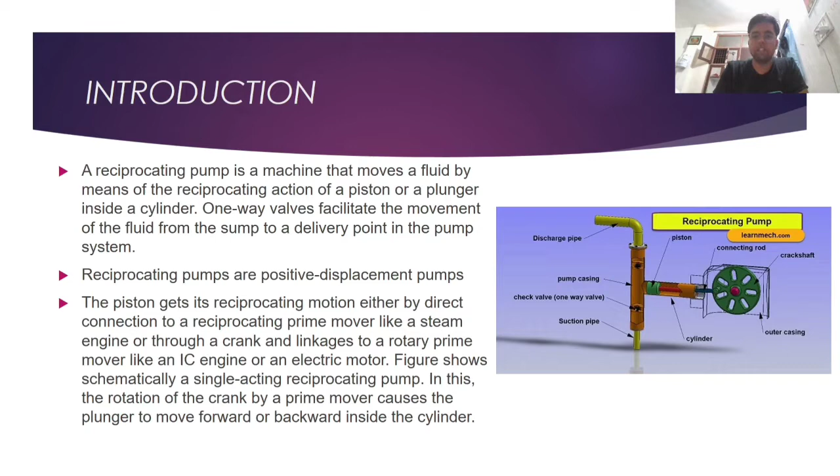To better understand this, let us use a video. These are basically the components inside a reciprocating pump: first a piston, then a cylinder. The piston is connected to the crankshaft through a connecting rod, and the crankshaft is connected to a motor.

The motor rotates the crankshaft, and the rotary motion is converted into reciprocating motion by the crankshaft. This reciprocating motion is then transferred to the piston through the connecting rod, which we will understand by the animation.

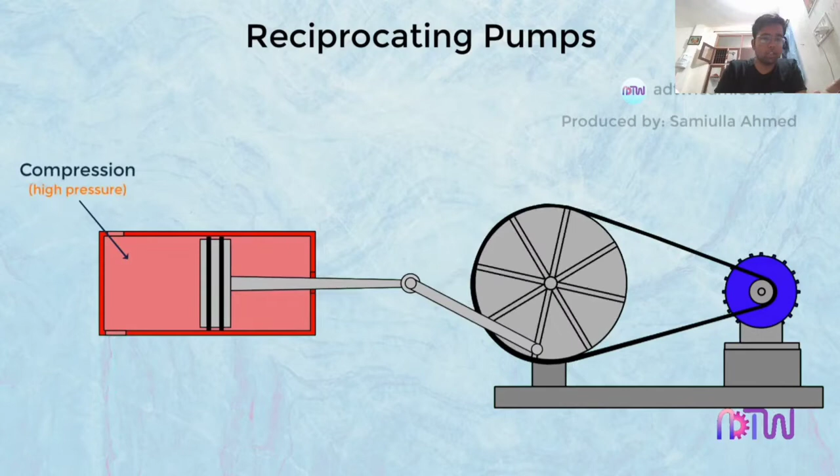As you can see, the crankshaft undergoes rotary motion and the piston goes reciprocating as well, first left then right. These are the two valves connected at the extreme left position of the cylinder. These are non-return valves: the bottom one is the suction valve, and the upper one is the delivery valve.

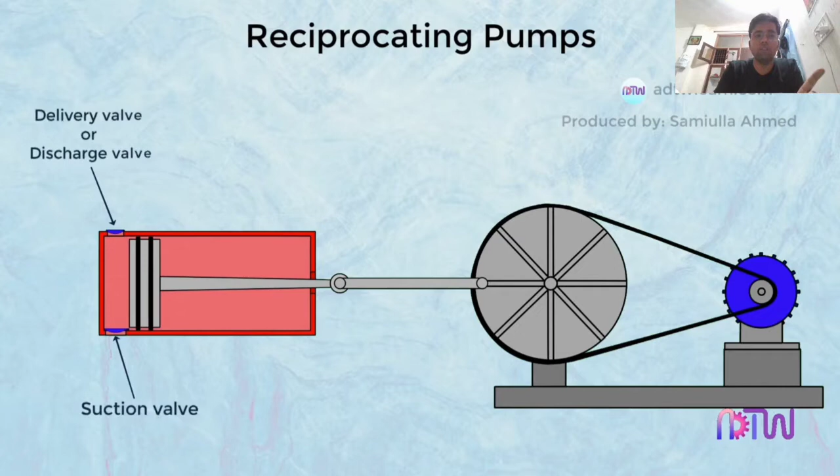When the piston moves from left to right, a low pressure is generated in the region above the suction valve. So from the sump, water is pumped into the cylinder. After that, as the piston goes to the extreme right position, you can see that all the water from the sump has been taken into the cylinder.

After this point, the suction valve closes and the delivery valve, which was closed, opens. Here the compression of the water takes place, and after that the water is discharged through the delivery valve into the tank.

A reciprocating pump is basically of two types: first is the single acting reciprocating pump, and the second is the double acting reciprocating pump. The example shown here is a single acting reciprocating pump. In a single acting reciprocating pump, there is actually a timed discharge.

As you can see, the suction valve opens, then the delivery valve opens. So the supply of fluid is not actually constant. We do provide some mechanism so that it can be constant, but it's not 100% constant at the same time.

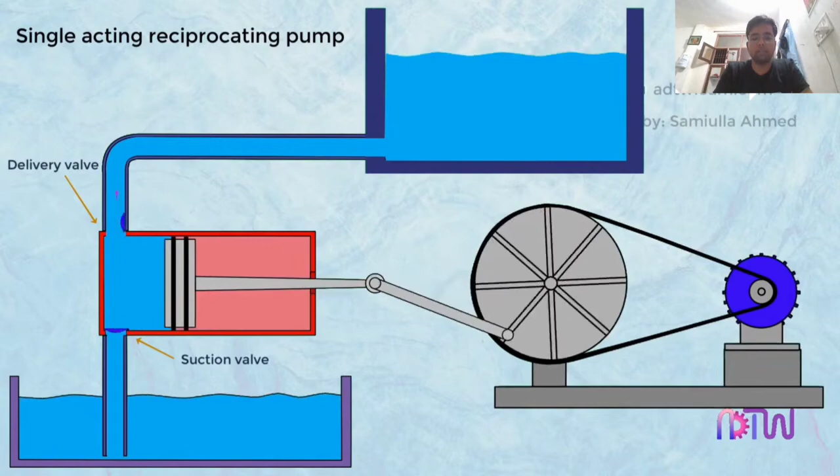Now I will talk about the second type of reciprocating pump, the double acting reciprocating pump. It has the same mechanism as the single acting reciprocating pump, the only difference being that at its extreme right position, two more valves are opened. In the double acting reciprocating pump, the cylinder is divided into two chambers.

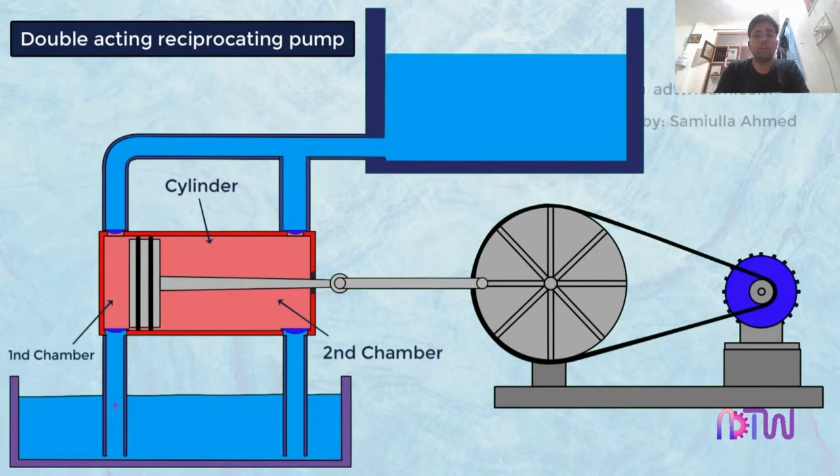In the first motion of the animation, when the piston moves from left to right, the suction valve opens in the first chamber, and through the sump the water is pumped into the cylinder. After that, it goes into compression, the discharge valve opens, and the suction valve of the first chamber closes.

Simultaneously, in the second chamber, the suction valve opens because a low pressure is generated at the extreme right position. So now the delivery valve of the first chamber is opened and the suction valve of the second chamber is opened at the same time.

After this, the discharge valve of the first chamber closes and the discharge valve of the second chamber opens, and the suction valve of the first chamber opens once again.

So it is a simultaneous process: when the piston moves from left to right, at that point in the first chamber the inlet valve is opened and the discharge valve is closed, as in a single acting reciprocating pump.

But when the piston moves from right to left again, a low pressure is generated at the extreme right position, where there is also an inlet valve which opens. Due to this low pressure, water from the sump comes in through the second chamber into the cylinder, after which it goes to the extreme left position.

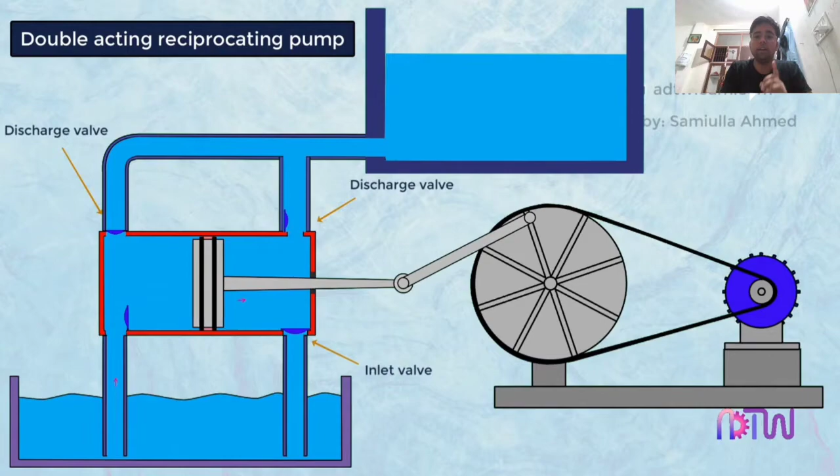Now let us come back to the PPT. Here I am basically showing the working I have already explained with the help of the video. Now what I am showing you here is a graph.

This graph shows the discharge versus crank angle for a single acting reciprocating pump. In the first stroke, when the piston moves from left to right, the crank moves from 0 to 180 degrees. At that moment no discharge is taking place, so the discharge value is 0 and there is nothing in the graph.

After that, when the piston moves from right to left, the crank moves from 180 to 360 degrees. At that point discharge is taking place because the discharge valve is open. At the midpoint of the cylinder, the discharge is at its maximum, at 270 degrees, as you can see from the graph. So we get a parabolic shape from 180 to 360 degrees.

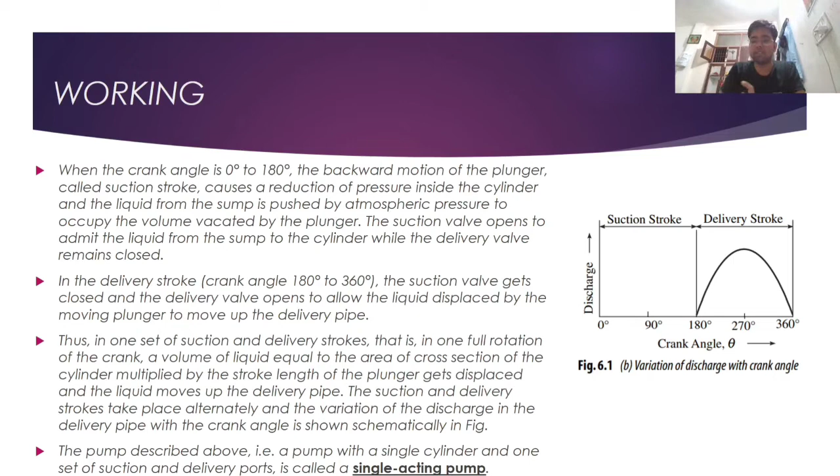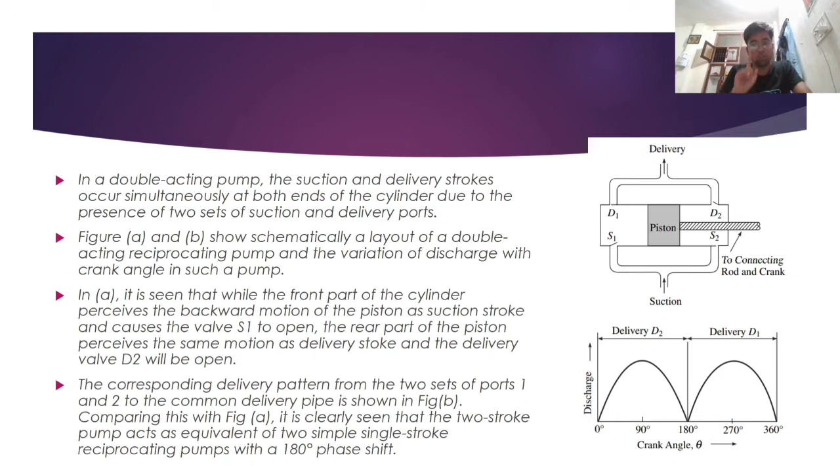Now here is the classification. The first type of classification of reciprocating pump is based on what is driving the pump: direct acting and indirect acting pump.

Sometimes we don't have a direct supply, so instead we use an electric motor or an IC engine to give us the power. This type of reciprocating pump is known as a power driven reciprocating pump.

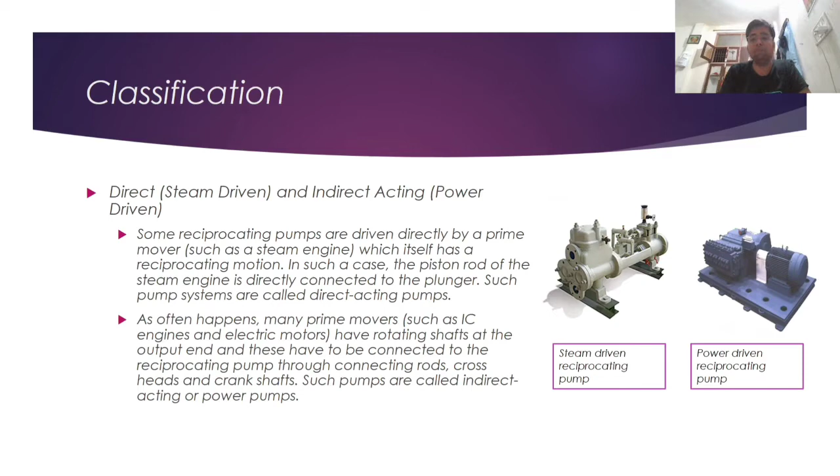The second type of classification is based on the number of cylinders: single cylinder, double cylinder and multi-cylinder pumps. A single cylinder pump has only one cylinder, and one-cylinder pumps are called simple pumps.

In a double cylinder pump there will be two cylinders. The suction pipes of both cylinders are connected to a common suction pipe, and the outlets of the two cylinders are connected to a common delivery pipe. This type of pump is known as a two-throw pump.

A multi-cylinder pump has multiple cylinders. This arrangement is employed to get a more steady flow in the delivery pipe. It is the most complex but also gives the most steady supply of water into the tank.

The third type of classification is vertical or horizontal, depending on the mounting of the pump. The reciprocating pump can be mounted either vertically or horizontally depending on the space and other operational features.

Another classification is low pressure or high pressure reciprocating pumps. Reciprocating pumps are employed for low discharge under high pressures, with pressure ranging up to as much as 150 atm, so the terms low and high are relative. Generally pressures up to 50 atm are treated as low pressure, and pressures higher than that are treated as high pressure reciprocating pumps.

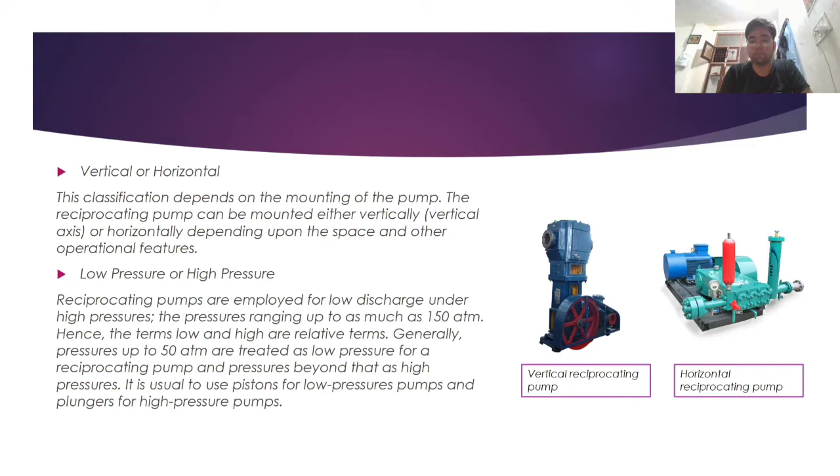Now, this is a common mistake that most people make: the difference between a piston and a plunger. In connection to a reciprocating pump, the terms piston and plunger are used interchangeably. Their functions are mostly the same, but they do have a difference between them.

A plunger is a smooth cylindrical rod attached to a slider or rod mechanism. A stationary seal is used around the plunger, and the plunger moves through the stationary seal ring. A piston consists of a cylindrical disc provided with a seal at the outer diameter. The piston is attached to a smooth rod called the piston rod that imparts reciprocating motion at the liquid end of the piston. The seal in the piston top moves with the piston.

For the plunger, because of this construction, plungers are single acting. For a double acting mechanism with plungers, two cylinders are required, and plungers are only used for high discharges, usually greater than 50 atm. Pistons can be used for low pressure also, that is less than 50 atm, and relatively high flows. Further, pistons are used in both single acting and double acting pumps.

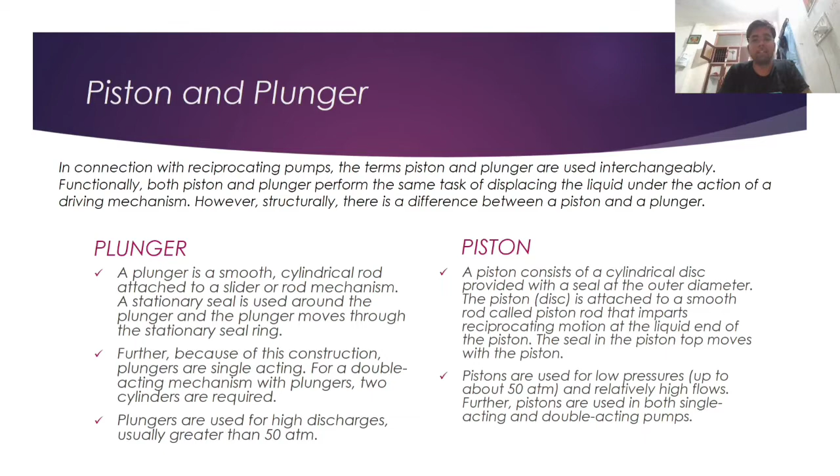So let L be the length of the stroke, A be the cross sectional area of the cylinder, and N be the speed of the crank, in RPM.

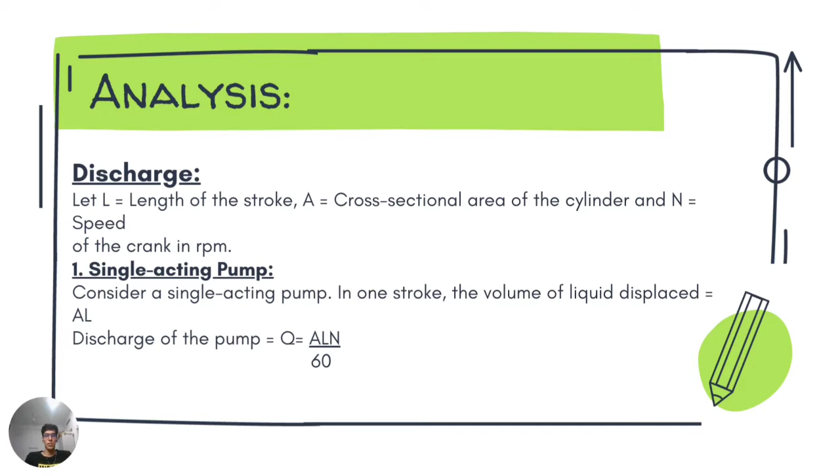Firstly, coming to the single acting pump. Consider a single acting pump: in one stroke, the volume displaced is equal to A into L, area into length of the stroke. Therefore, discharge of the pump Q is equal to A into L into N upon 60. Now coming to the double acting pump.

In a double acting pump, both sides of the piston will be displacing the liquid. In one revolution of the crank, the volume of liquid displaced is equal to A into L, which is the left side of the piston, plus (A minus AP) into L, where A minus AP is the area of the piston from the right side minus the area of the piston rod, where AP is the area of the piston rod attached to one end of the piston to connect it to the crankshaft.

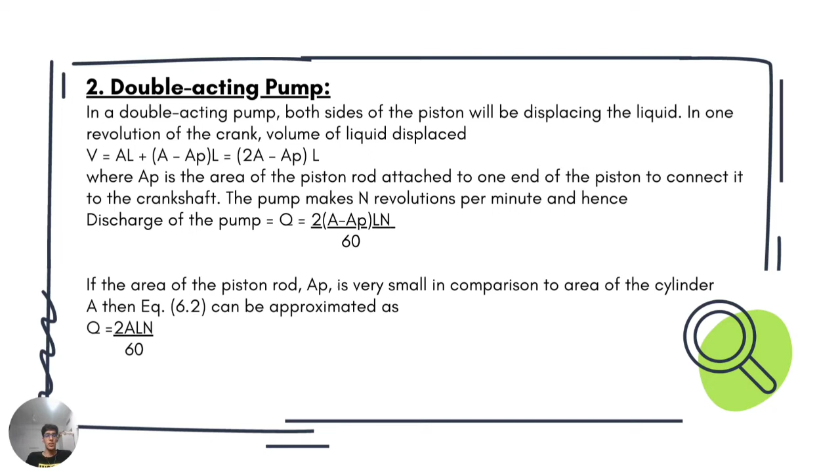The pump makes N revolutions per minute, and hence the discharge of the pump Q is equal to 2 into (A minus AP) into L into N upon 60. If the area of the piston rod AP is very small in comparison to the area of the cylinder A, then this equation can be approximated as Q equals 2 into A into L into N upon 60, which is nothing but 2 times the discharge of the single acting pump.

Now coming to volumetric efficiency. As discussed above, the earlier equations are the theoretical discharge of an ideal single acting and double acting reciprocating pump. The actual discharge of a pump may be less than the value given by the equation. This may happen for the following reasons: firstly, the major cause is slippage of fluid back past the pump valves because they cannot be closed or sealed instantly. This will vary between 1 to 5% based upon the pump speed and valve design.

Now, the volumetric efficiency of the pump, in percentage, is defined as eta V equals actual discharge upon theoretical discharge into 100, which is equal to QA upon Q, actual discharge upon theoretical discharge, into 100.

Now coming to the second term, coefficient of discharge. The ratio of actual discharge to the theoretical discharge is known as the coefficient of discharge, CD. Thus, CD is equal to actual discharge upon theoretical discharge.

Now coming to velocities and discharges. The displacement of the piston from the end of the stroke, x, is equal to r minus r cos theta, which is equal to r minus r cos omega t, which we have calculated through the crankshaft angle and the displacement of the piston.

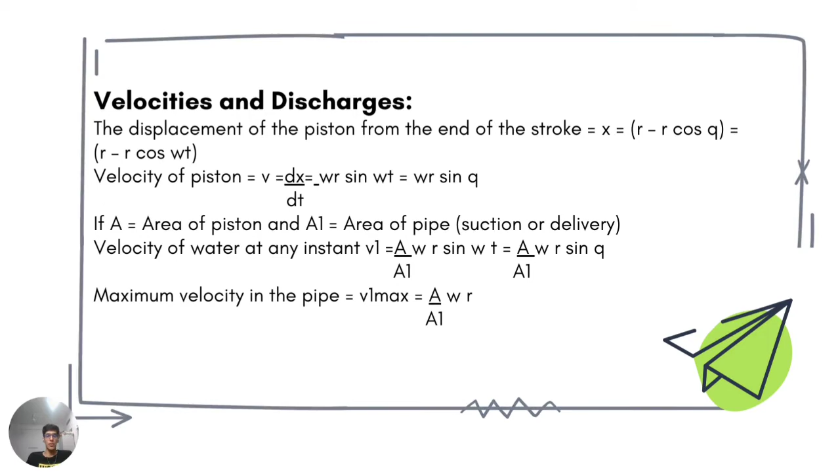So the maximum velocity in the pipe, by differentiating further, we have calculated, is equal to V1 max equals A upon A1 omega R. The mean velocity in a single acting pump is calculated by this formula, which gives us the result V1 max upon pi. Thus, the average velocity in the pipe, V1, is equal to A upon A1 omega R by pi.

Also from the above equation, the ratio of mean discharge Q to maximum discharge Q max in the delivery pipe equals Q upon Q max, which equals V1 upon V1 max, which is thus equal to 1 upon pi. We have also calculated the acceleration of the piston.

Acceleration is dV by dt. By calculating dV by dt, we get the acceleration of the piston, which equals omega square r cos theta, where theta is the angle of the crankshaft.

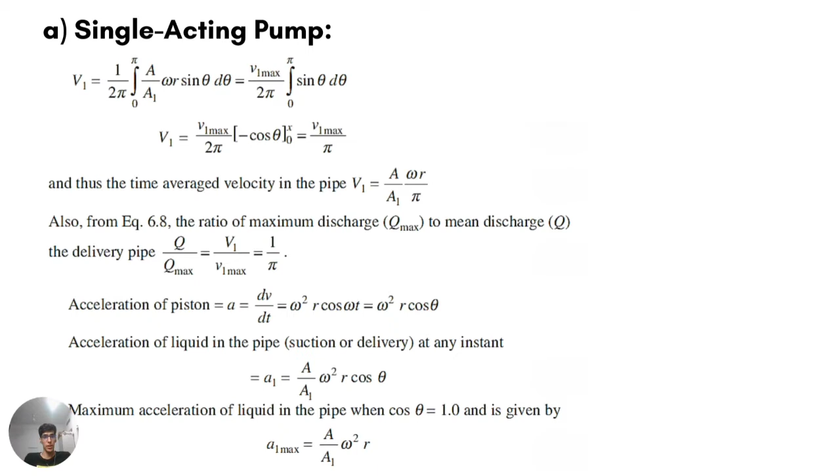Acceleration of liquid in the pipe, suction or delivery, equals a1, which equals A upon A1 omega square r cos theta.

Now coming to speed for double acting pump. For a double acting pump, the mean velocity of flow in one complete revolution of crank is given by V1 equals V1 max by 2 pi, integrated from 0 to pi of sin theta. Integrating sin theta, we get minus cos theta, giving 2V1 max by 2 pi, which equals 2V1 max by pi. So the ratio of V1 by V1 max equals 2 by pi.

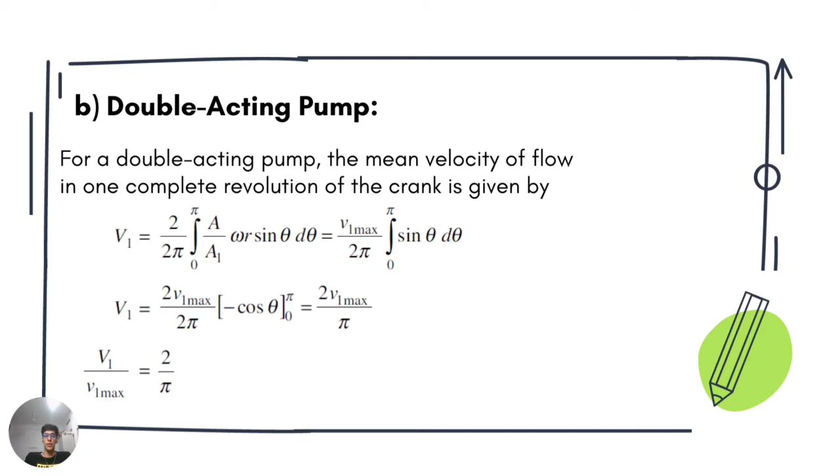Now coming to the variation of discharge in multi-throw pumps. By careful tracking of discharge in various cylinders at different crank angles, the flow variation in multiplex pumps can be worked out. Different figures show the variation for single, double, and three-throw pumps.

Expressing the variations of discharge as ratios of the average discharge. The theoretical flow variations for various commonly used multiplex pumps are represented. The table shows different values of discharge in different types of reciprocating pumps, clearly showing the advantage of multiplex pumps in obtaining uniform flow in the delivery pipe.

Analysis of the flow variation in double-acting multiplex pumps indicates improvement when compared to the simplex pump.

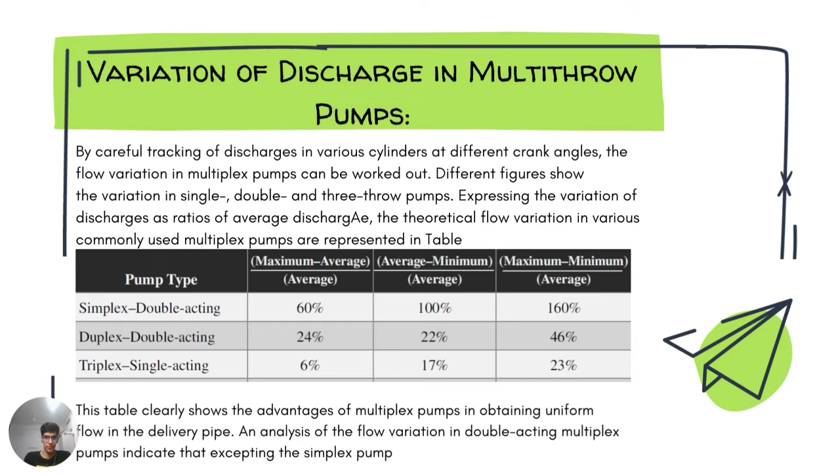Acceleration head is the energy required to change the velocity of the liquid in the system from an at-rest or zero condition to some non-zero value.

Now I will tell you about the principle of acceleration head. When the crank starts to rotate, the piston starts to reciprocate forward and backward within the cylinder between two extreme positions, the inner dead center and outer dead center. The velocity of the piston will be zero at these positions and maximum at the middle of the stroke, known as the center of the cylinder.

We can say that at the start of the stroke, suction or delivery velocity of the piston will be zero, then increasing to become maximum at the middle of the stroke, then decreasing until velocity becomes zero again at the end of the stroke.

Therefore, at the start of the suction or delivery stroke, the piston will have acceleration, which decreases to zero at the middle of the stroke. Further, retardation begins and becomes maximum at the end of the stroke.

In simple terms, the piston has acceleration at the start of the stroke and retardation at the end of the stroke. Since water in the cylinder is in contact with the piston, the velocity and acceleration of water in the suction and delivery pipe depend on the velocity and acceleration of the piston.

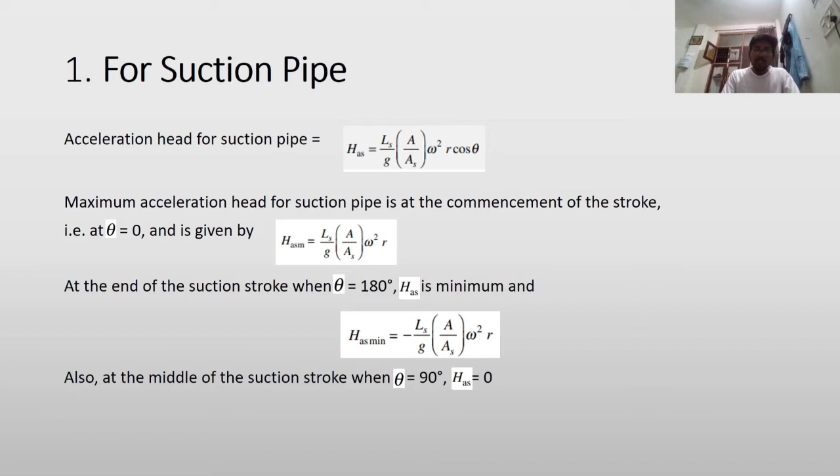At the end of suction stroke, when theta equals 180 degrees, acceleration head for suction pipe is minimum, and is minus Ls upon G, A upon As, omega square r. Also, at the middle of suction stroke, when theta equals 90, acceleration head for suction pipe is equal to 0.

For delivery pipe, acceleration head for delivery pipe is equal to LD upon G, A upon AD, omega square r cos theta, in which LD is length of delivery pipe, upon gravity into area of cylinder upon area of delivery pipe.

The maximum acceleration head for delivery pipe is at the commencement of the stroke, when theta equals 0, and is given by LD upon G, A upon AD, omega square r.

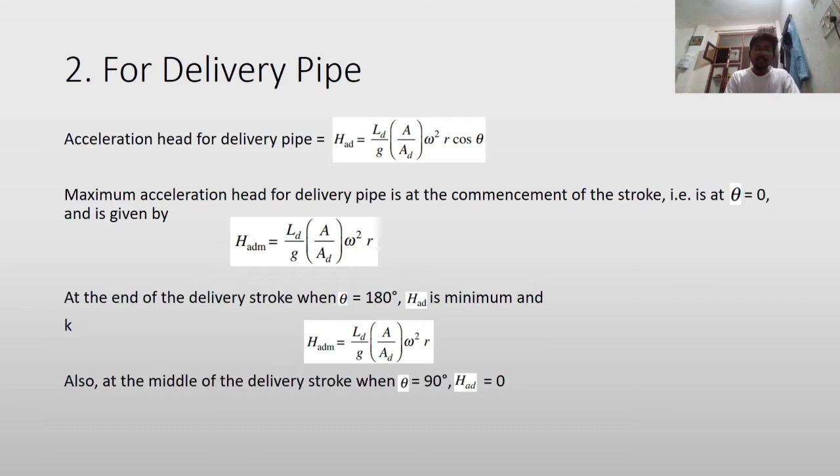At the end of delivery stroke, when theta equals 180 degrees, acceleration head for delivery pipe is minimum, and is LD upon G, A upon AD, omega square r. Also, at the middle of delivery stroke, when theta equals 90 degrees, acceleration head of delivery pipe is equal to 0. Now, correction for non-simple harmonic motion.

The flow of liquid in suction and delivery pipes causes a friction loss, and the pump has to provide power to overcome this loss. The friction loss HF is calculated using the Darcy-Weisbach equation, in the same form as used in steady flow in pipes.

Thus HF is equal to FLV square upon 2GD, where F is Darcy-Weisbach friction factor, V is average velocity in the pipe, and D is diameter of the pipe. In the present case, time average velocity in the pipe is used, and friction factor as given typically in Moody's diagram is used.

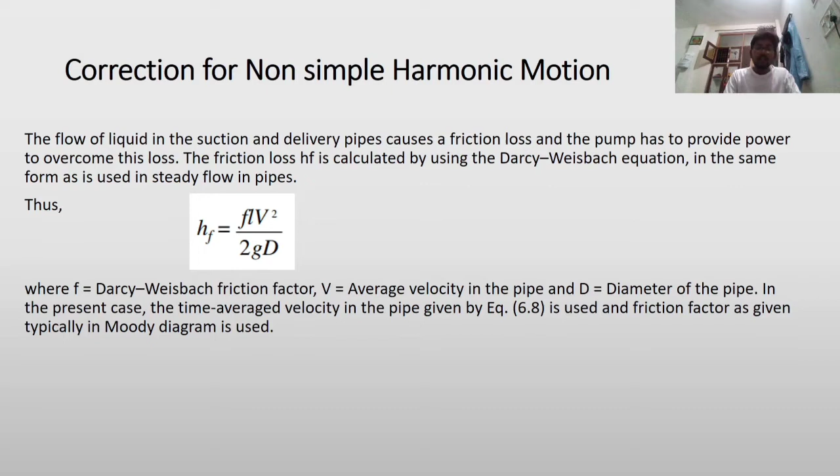Now, correction for non-simple harmonic motion for suction pipe, where frictional head loss HFS is equal to FLS upon 2G ds, A upon AS, omega r sin theta, whole square.

Since HF is a function of sin square theta, the frictional head loss varies parabolically with theta. This gives the average value of head loss in friction as 2 by 3 times the maximum value of frictional loss of head.

Maximum head loss due to friction in suction pipe occurs at theta equals 90 degrees, and its value is given by FLS upon 2G ds, A upon AS, r omega, whole square.

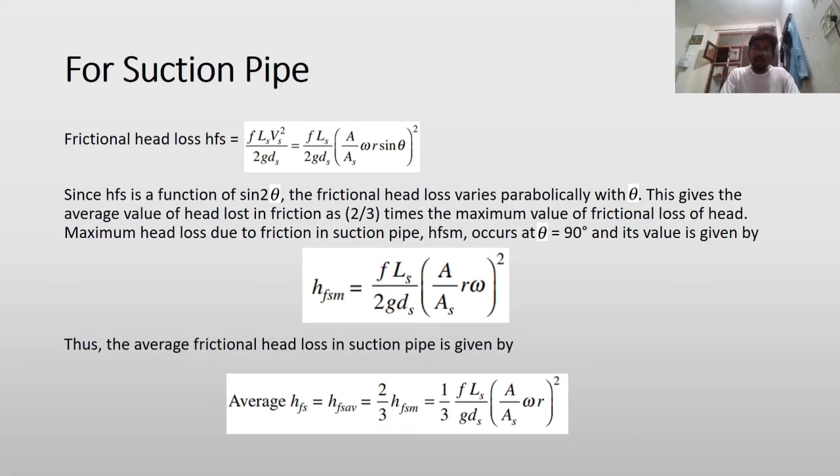Thus the average frictional head loss in suction pipe is given by 2 by 3 HFSM, which is equal to 1 by 3, FLS upon G ds, A upon AS, omega r, whole square.

Now, combined effect of static, acceleration, and friction heads. In a simple reciprocating pump, the pump has to produce enough head to overcome static head, friction head, and acceleration head at both suction and delivery pipes. Considering the suction pipe first, the total head in suction pipe measured as absolute pressure head is HTS equals HATM minus HS plus HAS plus HFS, where HATM is atmospheric pressure, HS is static suction head, HAS is acceleration head in suction pipe, and HFS is average friction head in suction pipe.

Similarly, in the delivery pipe, the total head measured as absolute pressure head is HTD equals HATM plus HD plus HAD plus HFD, where HATM is atmospheric pressure, HD is static delivery head, HAD is acceleration head in delivery pipe, and HFD is average frictional head in delivery pipe.

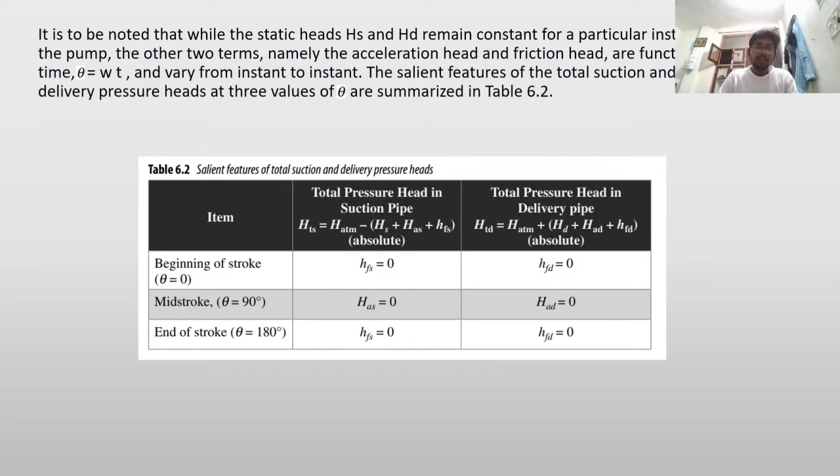An indicator diagram of a reciprocating pump is a plot showing the variations of pressure in the cylinder, the displacement of the piston, and at various stages of the piston strokes. The area of the indicator diagram represents the work done by the pump per unit weight of the liquid in one complete revolution of the crank.

Figure 1 shows a theoretical indicator diagram of an ideal reciprocating pump, a pump with no acceleration head and no frictional losses. The ordinate represents the pressure heads on the plunger and the abscissa represents the displacement of a plunger of unit length. The horizontal line, that is O O,

as shown here, the O O datum line at the bottom of the figure represents the absolute zero pressure head, which is taken as the datum for pressure heads. Line AB represents the atmospheric pressure head, HATM.

Line JK represents the suction stroke. Point J represents theta equals 0, and point K represents theta equals 180 degrees of the suction stroke. The suction head developed at the cylinder inlet is HS at location J, and it remains constant all along the stroke till the end point K.

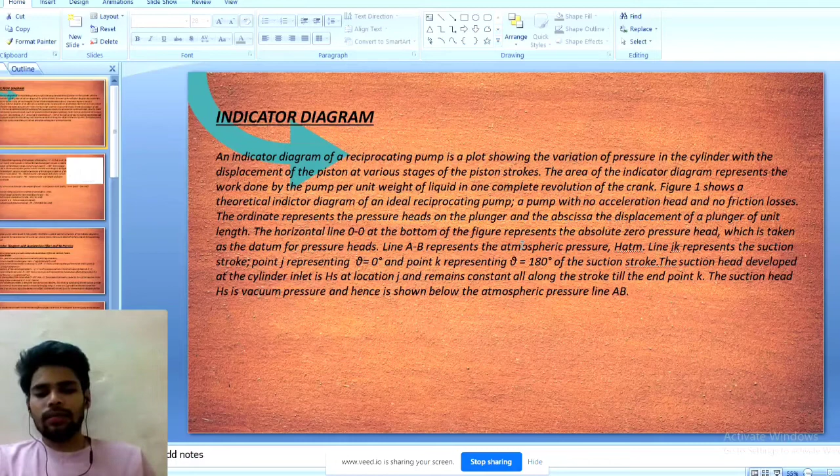Now point I marks the beginning of the delivery stroke with theta equals 0, as shown here, and at that point the pressure head in the cylinder is HD, and the head developed remains constant till the end of the delivery stroke at M, at which theta equals 180 degrees. The pressure head HD, which is above the atmospheric pressure, is marked accordingly in the figure.

The stroke length, which is equal to the length of the plunger, is taken as unit dimension. Area JKBA equals HS, which is equal to the work done per unit weight of the fluid in a suction stroke. Similarly, area ABLM equals HD, which represents the work done per unit weight of fluid in the delivery stroke.

Hence, total work done per unit weight of fluid equals area JKBA plus area ABLM, that is HS plus HD. If the area of the cylinder is A and the stroke length is L, then the weight of liquid pumped in one revolution of the crank is W times A times L. Work done per revolution of the crank is WAL(HS plus HD). Now the theoretical work done per second, PT, equals WALN divided by 60, multiplied by HS plus HD.

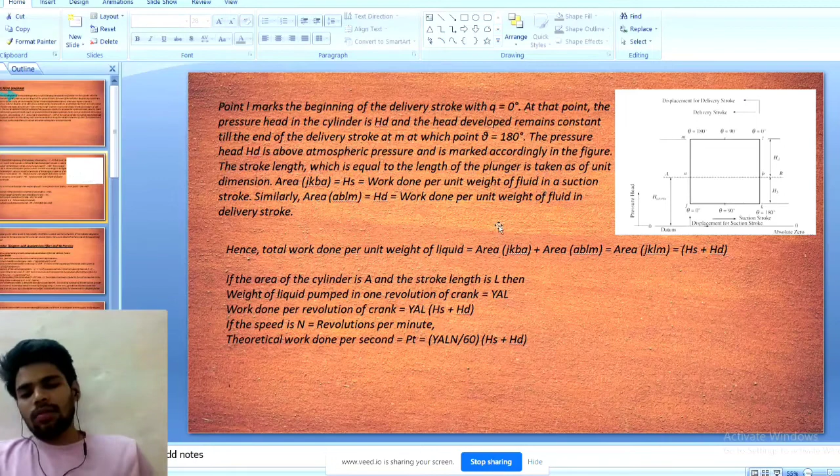Now let's start the indicator diagram with acceleration effect but no friction effects. Let's consider a single acting simplex pump with acceleration effect but without friction. First stroke is the suction stroke. The equation gives the acceleration in the suction pipe at any instant.

Acceleration head for the suction pipe HAS equals LS divided by G, multiplied by A divided by AS, multiplied by omega square r cos theta. The maximum acceleration head for the suction pipe is at theta equals 0, that is at the beginning of the stroke, and is given by HAS equals LS by G multiplied by A divided by AS, omega square r.

Also, at the middle of the stroke when theta goes to 90 degrees, the acceleration head term goes to 0 and is added to the suction head HS. At the end of the stroke at theta equals 180 degrees, HAS is minimum, so being a deceleration effect, it is deducted from the suction head HS.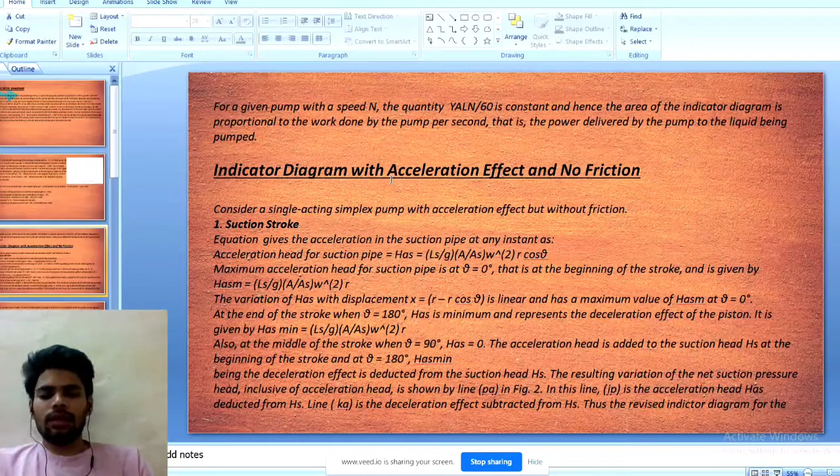The resulting variation of the net suction pressure head inclusive of the acceleration head is shown by the line PQ in Figure 2, shown here. So the suction stroke that includes the acceleration effect is APQB, that is A, P, Q and B.

Note that the triangular portions JPP1 and P1KQ are identical and hence are of equal area. Hence area APQB equals area AJKB, which equals HS multiplied by 1, which comes out to be HS.

In the second stroke, that is the delivery stroke, the column of water in the delivery pipe will be accelerated at the beginning and the first half of the delivery stroke. It will be decelerated in the second half of the stroke until the end of the stroke.

The acceleration head for the delivery pipe is given by the equation HAD equals LD divided by G multiplied by A divided by AD into omega square r cos theta. HAD is maximum at the beginning of the delivery stroke, when theta equals 0, with maximum value HAD equals LD by G multiplied by A divided by AD multiplied by omega square r. At the middle of the stroke, when theta equals 90, HAD equals 0, as indicated by the point shown here.

The rectified indicator diagram of the delivery stroke, accounting for acceleration effect, is the area ABRS. The areas ABRS and ABLM indicate that acceleration does not change the total work done in the delivery stroke, but only alters the distribution of the pressure head at various displacements of the delivery stroke.

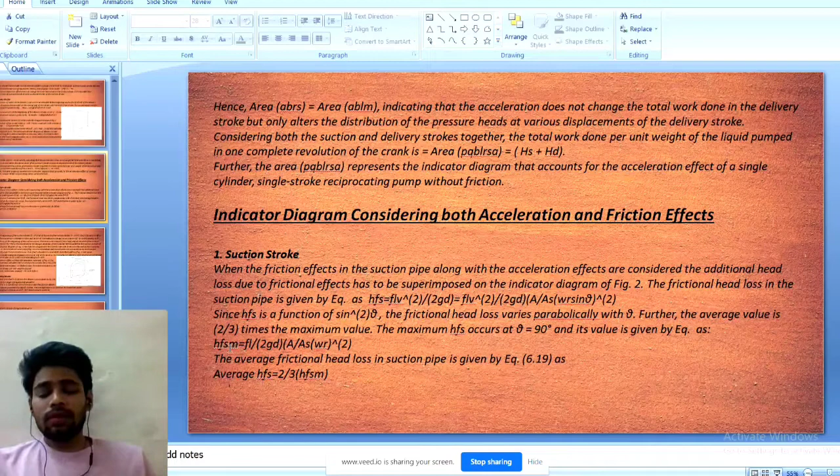At the beginning of the suction stroke, when theta equals 0, and at the end of the suction stroke, when theta equals 180, the frictional loss HFS is 0. The maximum ordinate is HFSM, which occurs at the mid suction stroke, at point E of figure 3 as shown, corresponding to theta equals 90 degrees. Thus at the beginning of the suction stroke, the total suction head is HS plus HAS, and at the end of the suction stroke it is HS minus HAS.

Now for the delivery stroke, the head loss due to friction in the delivery pipe is given by HFD equals FLV square divided by 2GD, which equals FL divided by 2GD into A divided by AD into omega r square sin theta. Since HFD is a function of sin square theta, the frictional head loss in the delivery stroke varies parabolically with theta.

Further, the average value is 2/3 times the maximum value, and the average frictional head loss in the delivery pipe is given by equation 6.22: average HFD equals 2 by 3 of HFDM. The indicator diagram for the delivery stroke will have the extra head HFD added to the indicator diagram of figure 6.5.

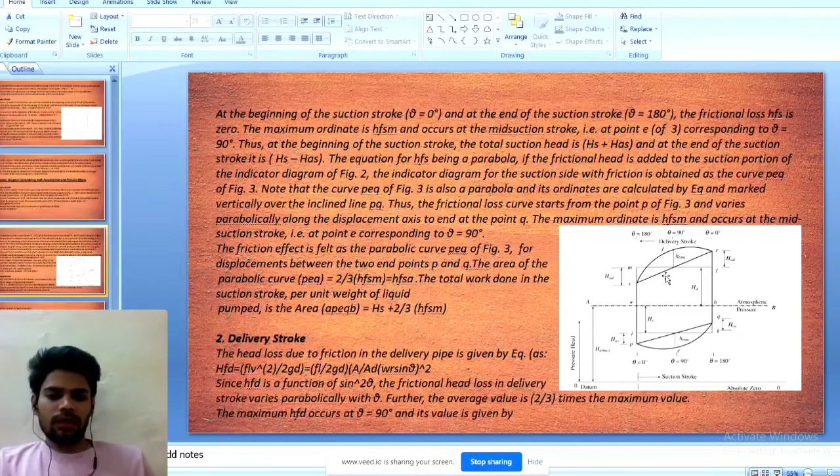The resulting indicator diagram of the delivery pipe is shown in figure 6.6. The parabola RFS reflects the frictional effects, with the maximum of this parabola occurring at point F, corresponding to theta equals 90 of the delivery stroke.

Now, the theoretical work done per second. The total work done per unit weight of liquid pumped in one complete revolution of the crankshaft is the sum of the areas of the indicator diagram of the suction and delivery strokes, given by the areas represented by APEQ PRFS of figure 6.6. This equals HS plus 2/3 of HFSM plus HD plus HFSDM.

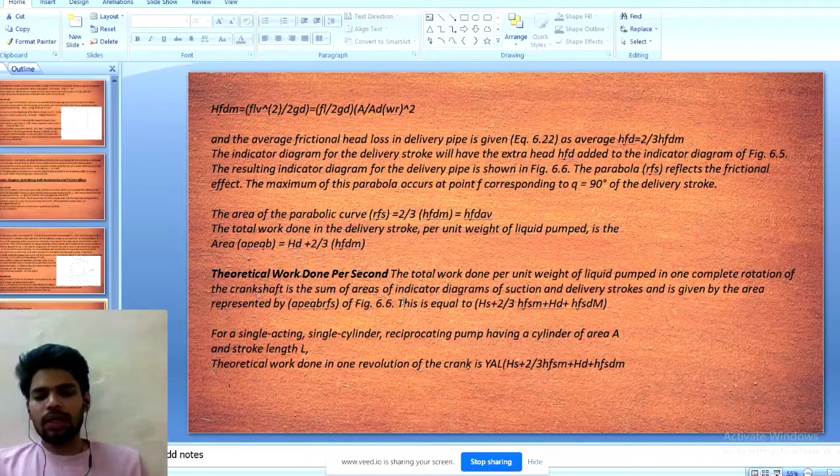If N represents the speed of the pump in revolutions per minute, then Pt equals YALN divided by 60, multiplied by HS plus 2 by third of HFSM plus HD plus HFSDM.

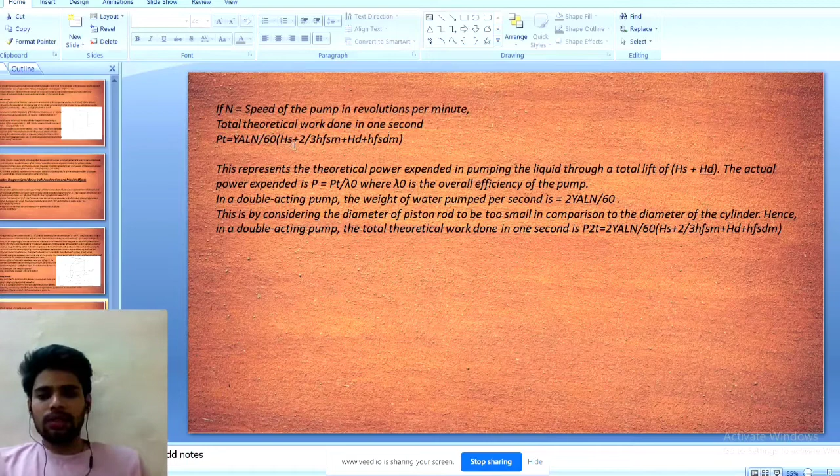General characteristics: efficiency. There are two types of efficiency, volumetric efficiency and mechanical efficiency. Volumetric efficiency loss is essentially due to slippage at valves and seals. Mechanical efficiency loss arises due to friction at bearings and at speed reducing devices. Thus, the efficiency of a reciprocating pump is normally very high, being of the order of 85 to 90% in a well-maintained pump.

Second, pressure. Capacity to produce high pressure is a special feature of the reciprocating pump. Pumps with pressure up to 70 bar are routinely used, and special pumps can have pressure as high as 400 bar.

Third, priming. The reciprocating pump is self-priming. However, where possible, to reduce wear or the risk of seizure, it should be flooded with liquid before starting.

Fourth, pressure pulsation. Pressure pulsation is inherent in the reciprocating mechanism. Flow variation is an indication of scope of pressure fluctuation, which is a product of acceleration created by the pump. A pulsating pump flow may require special design consideration in the piping system to avoid vibration of piping and consequent failure of system components by fatigue.

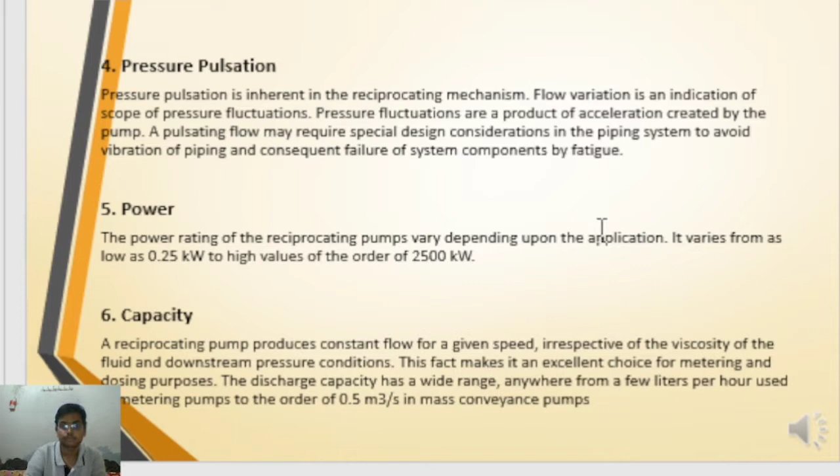Speed. Reciprocating pumps are essentially slow speed pumps. Usual speed covers a range from about 100 rpm up to 700 rpm. Reducing gears are invariably used when the prime mover is an electric motor or an IC engine.

Now coming to the application. Industrial use: reciprocating pumps can handle a full range of liquids, from low viscosity chemicals to high viscosity materials like heavy oils, from clean water to high particle content slurries including concrete. In view of the wide operating range, reciprocating pumps are often the choice for difficult applications, especially when the discharge is low and pressure is high.

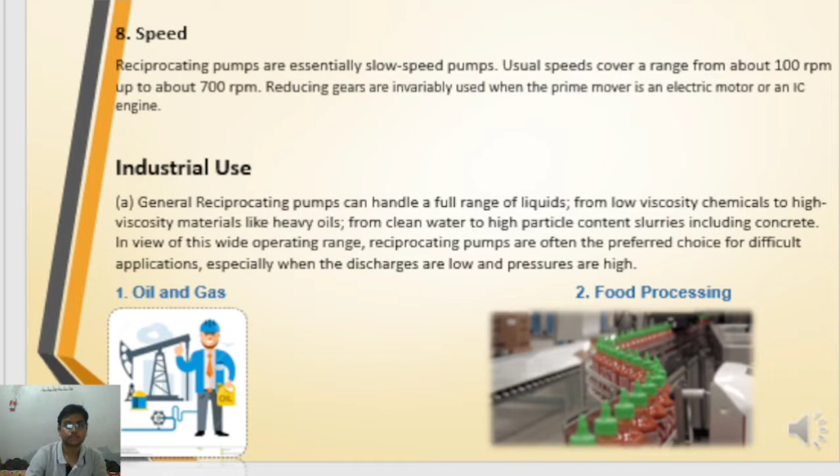Applications include oil and gas; second, food and food processing; third, mining; fourth, water treatment plants.

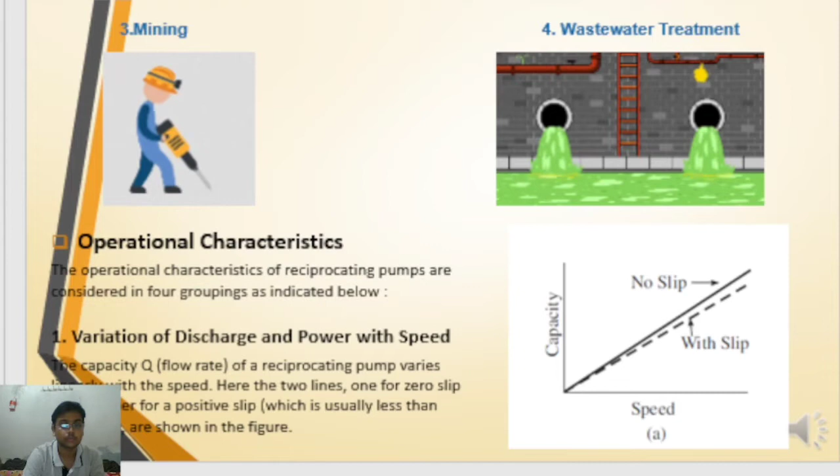Now coming to the operational characteristics. The operational characteristics of reciprocating pumps are considered in four groupings. First, variation of discharge and power with speed. The capacity Q, or flow rate, of a reciprocating pump varies linearly with speed. Two lines are shown in the figure, one for zero slip and another for positive slip, which is usually less than about 3%.

Second, variation of flow rate with pressure head. The graph shows that the flow rate is constant at all values of head. This consistency of flow rate regardless of head is a typical characteristic of a reciprocating pump. The flow rate can be varied only by changing the speed or displacement. A pressure relief valve determines the maximum pressure head that can be attained in a pump setting.

Third, variation of efficiency with head. Figure C shows schematically the variation of efficiency of a reciprocating pump with head. It is seen that the efficiency is constant over a wide range of head. The corresponding variation of efficiency of a centrifugal pump with head is shown as a dotted line.

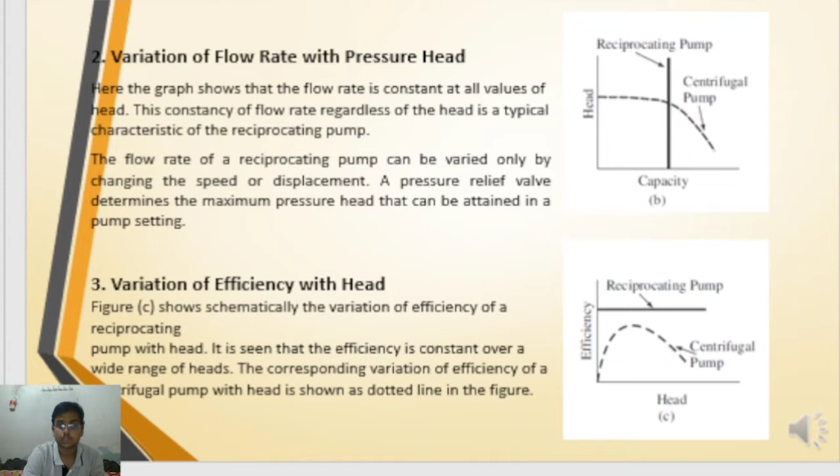Now coming to cavitation. Since we are concerned with liquid as a pumping medium, the fluid should remain in the liquid phase throughout the pumping system. At any point in the suction line, the pressure should be high enough so that vapor bubbles do not form in the pipeline. If at any point the pressure falls near the vapor pressure of the liquid, the dissolved gases would first separate from the liquid; this process is called separation.

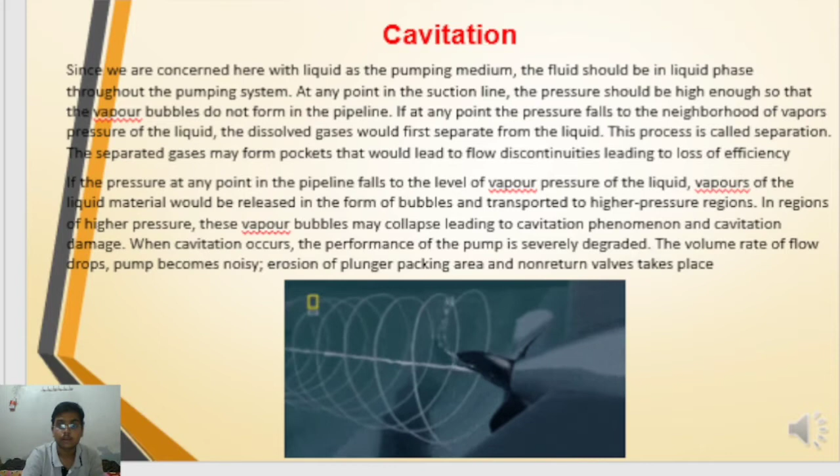The separated gas may form pockets that lead to discontinuous flow, causing loss of efficiency. If the pressure at any point in the pipeline falls to the level of the vapor pressure of the liquid, it releases bubbles which are transported to a higher pressure region. There, these vapor bubbles may collapse, leading to the cavitation phenomenon and cavitation damage. When cavitation occurs, the performance of the pump is severely degraded: the volume rate of flow drops, the pump becomes noisy, and erosion of the plunger, packing area and non-return valves takes place.

Now coming to NPSH, net positive suction pressure required. The pump manufacturer, through tests in the laboratories, determines the suction pressure required to avoid cavitation for each pump design. The result is indicated as NPSHR, net positive suction pressure required, for the pump at designated operating pressure head and discharge. NPSHR for a reciprocating pump is defined in a slightly different way than that for a centrifugal pump.

For a reciprocating pump, it is defined as the head in absolute units, measured above the prevailing vapor pressure head, required by the pump to obtain satisfactory volumetric efficiency, usually no more than 3% reduction of capacity, and to prevent excessive cavitation.

While NPSHR is a characteristic of the pump, NPSHA is dependent on the pump setting and pump operating characteristics. It is the head in absolute units, measured above the prevailing vapor pressure head, available to the pump at the pump inlet. With the usual notation, it could be shown as given in the equation below.

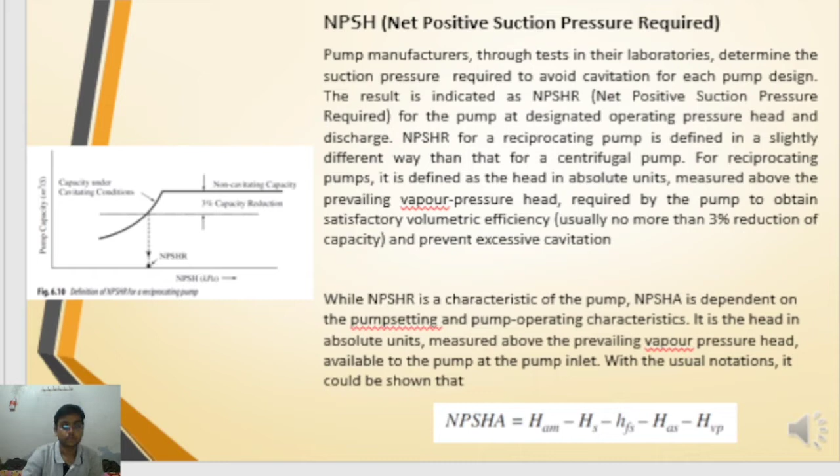Now, pump installation. The installation of the pump should be such that it achieves the NPSHR of the pump with a margin M. The net positive head available at the site is NPSHA. The difference between NPSHA and NPSHR is the margin M.

The usual practice for a reciprocating pump is to provide a margin M as a percentage of NPSHR, or 1.5 to 3.5 meters, depending upon the type of liquid, type of pump, and recommendation of the manufacturer.

The objective of the pump setting is to have maximum NPSHA at a given location. The following are the possibilities to maximize NPSHA in the setting of a reciprocating pump. First, reduce the suction lift HS. Second, reduce friction loss — toward this, reduce the suction pipeline length, maximize the suction pipe diameter, or minimize the number of bends, tees and valves in the suction pipe.

Third, increase absolute pressure if possible. Fourth, use multiplex pumps. Fifth, use air vessels and other pulsation reducing devices in the suction pipe.

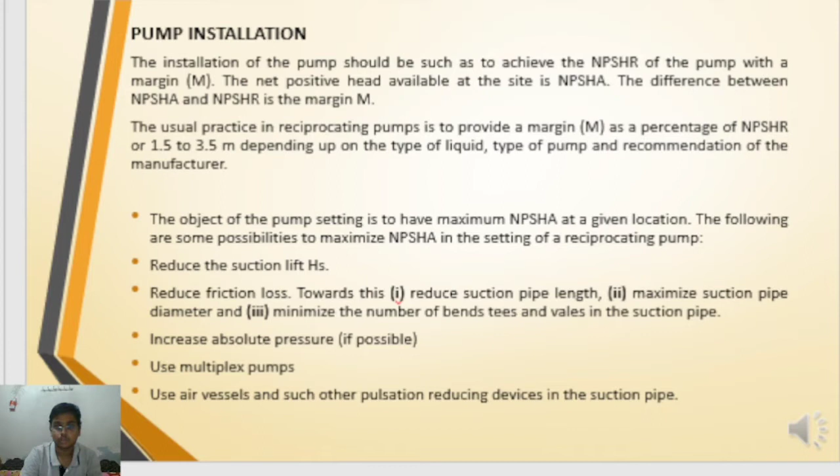Air vessels — what are air vessels, where they are located, their use, and the basics of the equations used for air vessels. So first of all, we will discuss about

flow dampening, because that's why air vessels are used. The flow from a single acting reciprocating pump is highly fluctuating, and the delivery pipe carries flow only during one half of the cycle. In the remaining part of the cycle, during the suction stroke, the delivery pipe does not carry any flow at all. This results in a highly variable discharge rate in the pipe, and this high variation of flow in each cycle of the crank leads to undesirable flow characteristics and also uneconomical pipe design.

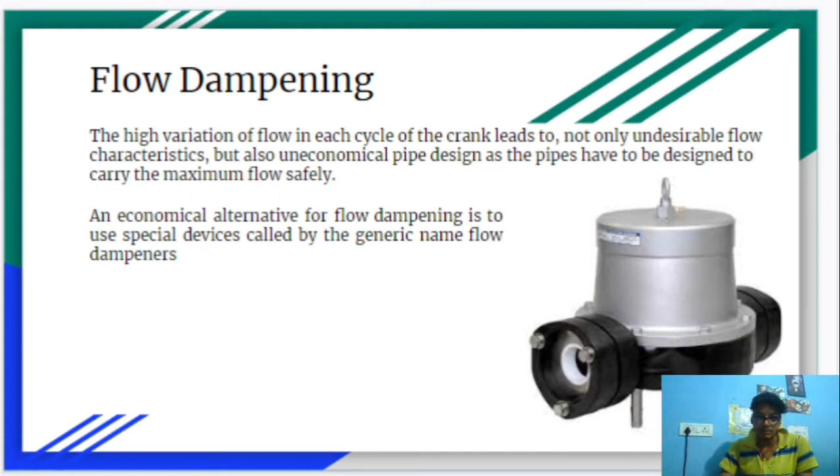The pipe has to be designed to carry the maximum flow safely. An economical alternative for flow damping is to use special devices with the generic name flow dampeners. These devices are used as an attachment to all types of reciprocating pumps, but here we will discuss air vessels.

An air vessel is a large closed chamber fitted to the reciprocating pump to eliminate pulsation in the flow of the pipe connected to the pump. One air vessel is fitted at the end of the suction pipe and one at the delivery pipe, as close to the pump as possible, because this reduces the flow fluctuation in the rest of the pipe length.

An air vessel is a closed chamber made of cast iron or steel, and it contains compressed air. It contains a bladder or bag placed inside the chamber, made of synthetic rubber, whose main function is to prevent the loss of compressed air.

In this process, the liquid compresses the air and the bladder, and when the pressure in the pipeline connected to the air chamber is lower than that of the bladder, the air pressure in the bladder forces the liquid to move out of the vessel.

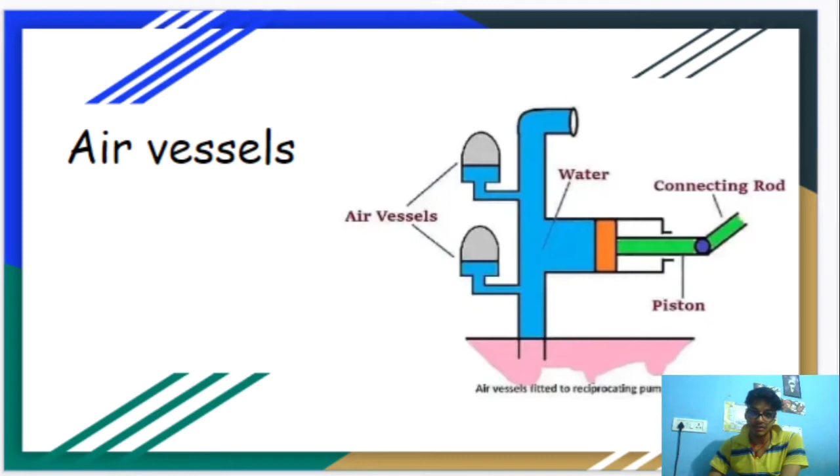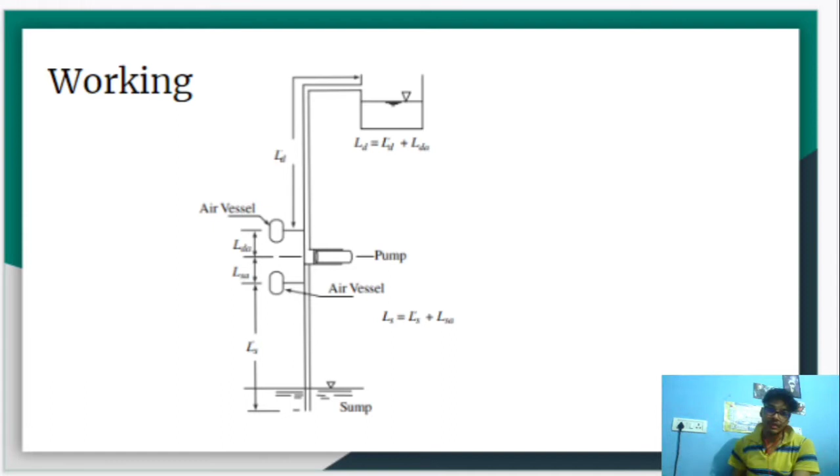It will be considered that the frictional losses remain constant along the time, so the flow is no longer unsteady, and it is necessary that the size of the vessel be appropriately allocated for it to function effectively for a single acting pump. For two air vessels, each having a volume of 6 to 9 times the volume of the cylinder, this is considered an adequate design for an air vessel.

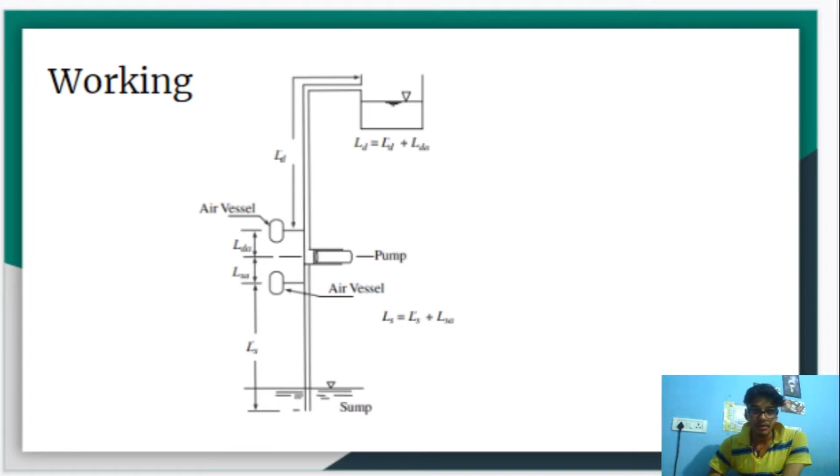Then we have the indicator diagram, for a single acting reciprocating pump equipped with two ideal air vessels of sufficient capacity, one on the suction side fitted very close to the pump. We can note that the acceleration heads for the delivery and suction are negligibly small, therefore they are taken as zero. Because of the uniform delivery velocities, the frictional losses are also constant along the respective strokes.

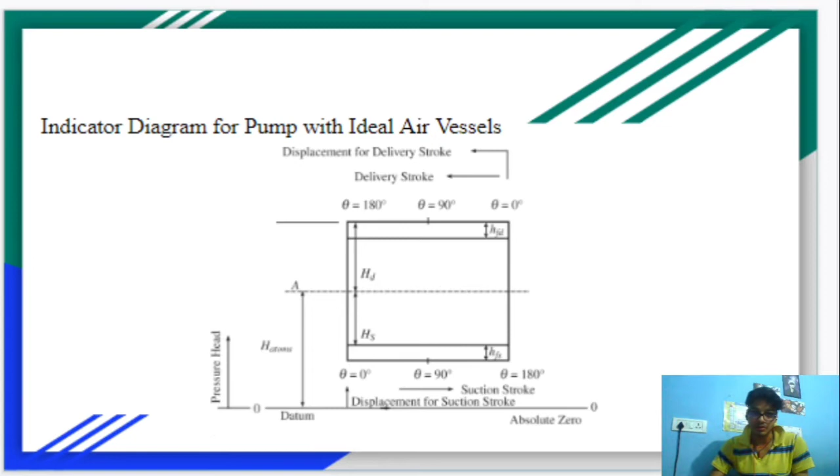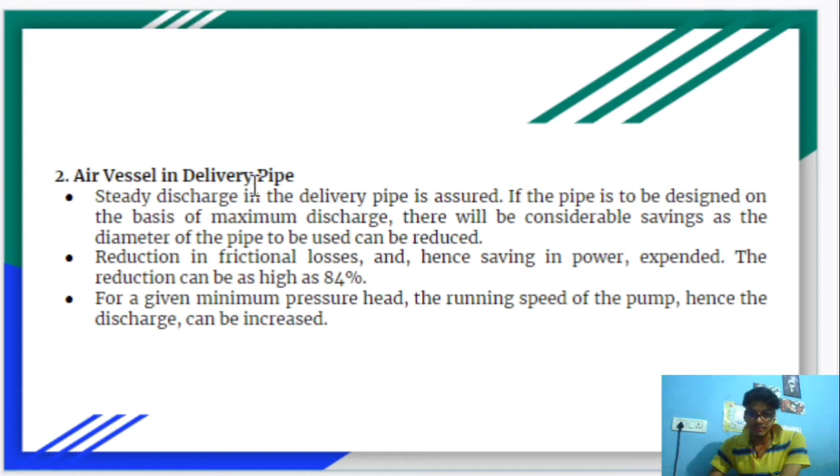And for the delivery, a steady discharge can be assured. Designing the pipe on the basis of maximum discharge, there will be considerable saving in diameter, which also saves in the cost of the pipes, reduces the frictional losses, helps in saving power, and increases the discharge.

So here we start the formulas and analysis of a single acting reciprocating pump with air vessels. As you can see, these are the terms which we are going to use.

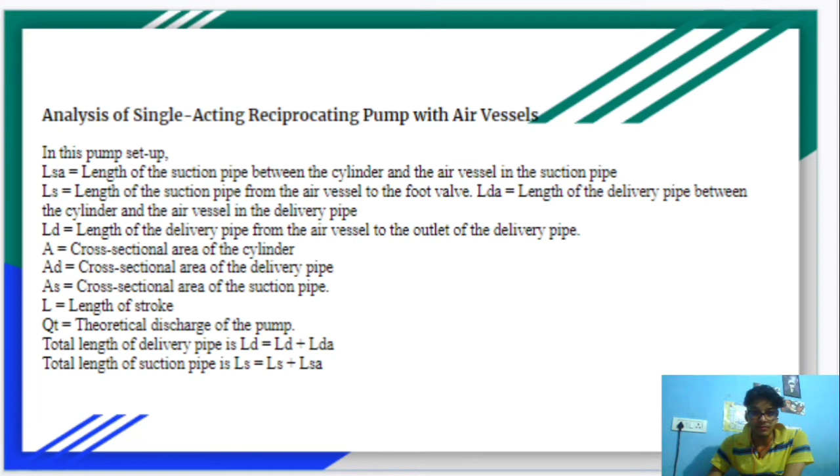First we will start with the velocity. This is the velocity at the delivery pipe, and this is the average velocity at the suction pipe. You can see this is the derivation for the average velocity.

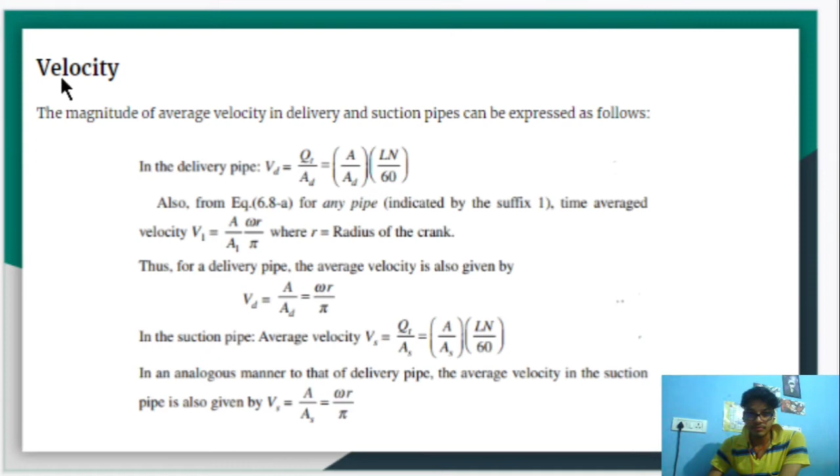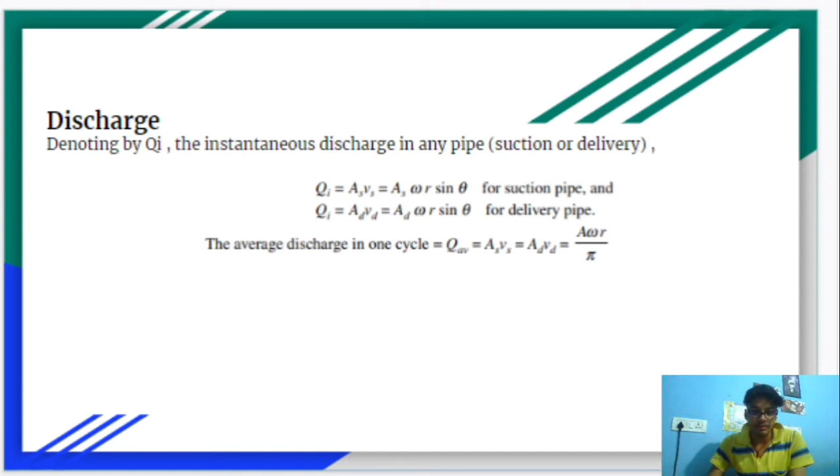Then we have the discharge, where Qi is the instantaneous discharge in any pipe, suction or delivery, both are same: area of suction into omega r sin theta, and area of delivery into omega r sin theta, which if the area is the same, then both are the same.

For the pressure heads at the suction pipe, there are two heads: the acceleration head and the friction losses, and the same applies for the delivery head. For the length LSA, the acceleration of the flow is confined to reach this length from the pump to the air vessel, while the rest of the suction pipe is free from the acceleration effect, as steady uniform flow prevails there. This is the second reach, and there are no other friction losses due to unsteady flow prevailing between the air vessel and the cylinder.

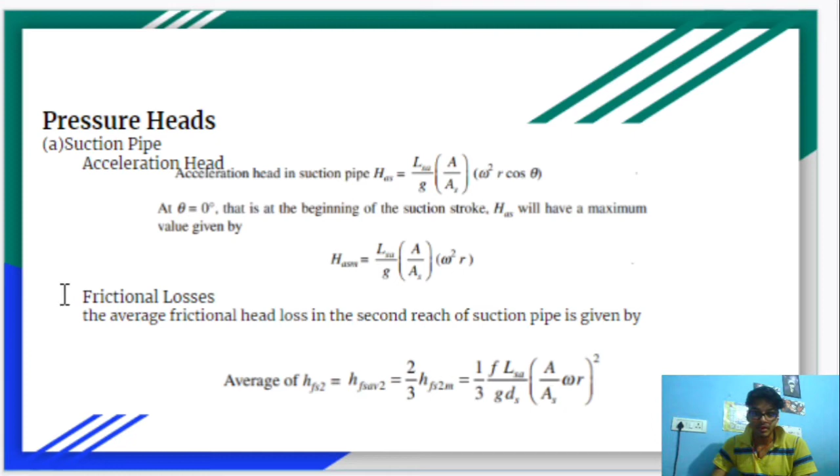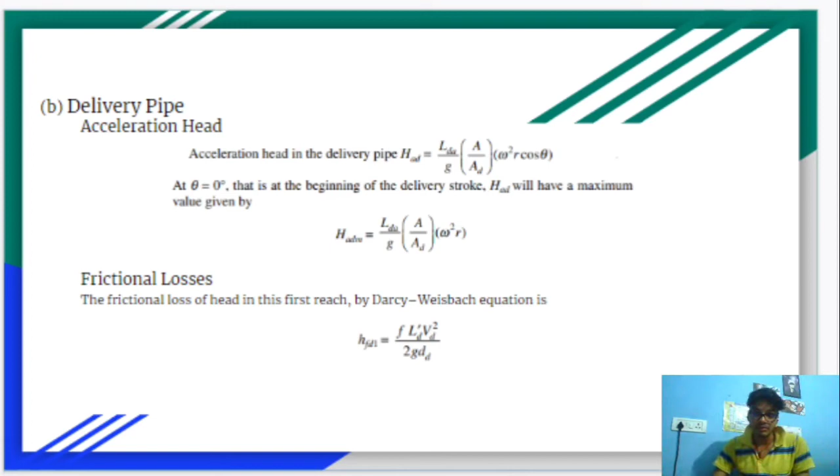And these average friction losses are given by this formula. For the delivery pipe, the theoretical work done by the reciprocating pump with the air vessel includes this acceleration head, and the friction losses according to the Darcy-Weisbach equation is given by this.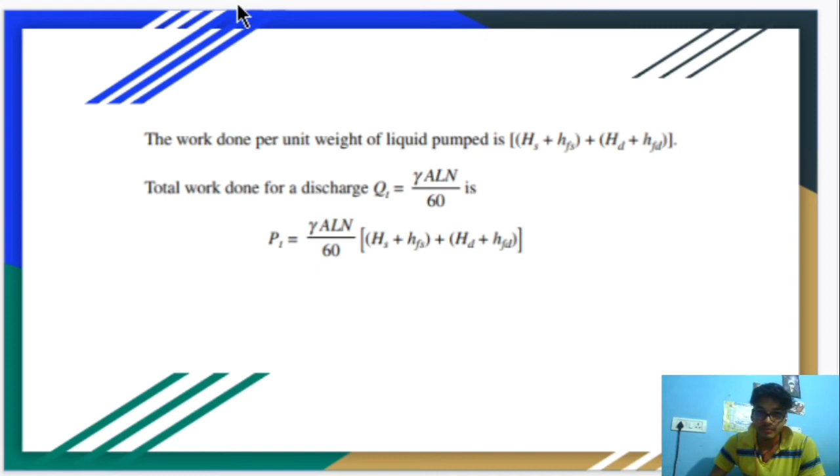Then the theoretical work done per second will be this, and by neglecting the velocity head and substituting QT, the simplified equation, we will get this. And for the power consumption, this is the formula.

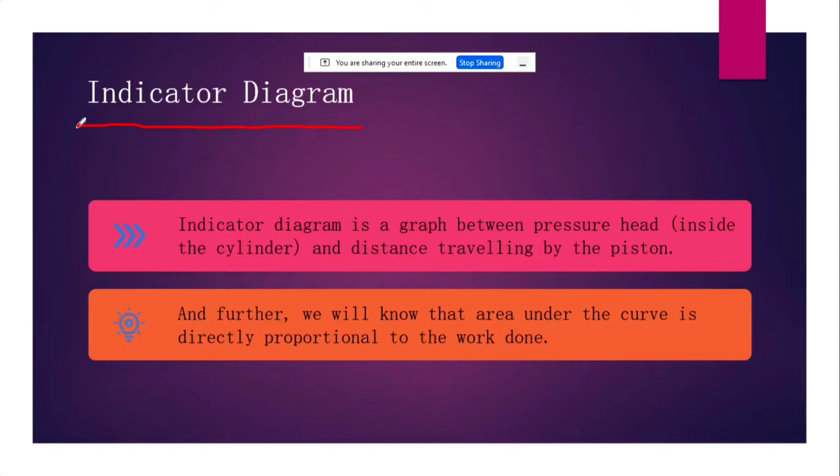Here we are talking about this area, J, K, L and M. Area under J, K, L, M is directly proportional to the work done, which we will see in the later slide. Now we will see the ideal indicator diagram.

Here line JK is the suction stroke line, whereas line LM is the delivery stroke, and the dotted line represents atmospheric pressure. When the piston sucks the water, the pressure inside the piston gets lower, so we can say it is less than atmospheric pressure, and the suction head is constant as well.

Here HS is suction head. Suction head is less than atmospheric pressure. And if we talk about delivery head, this is HD, which is also constant, but delivery head has to supply water. So for this reason, delivery head has pressure greater than atmospheric pressure. They both are constant.

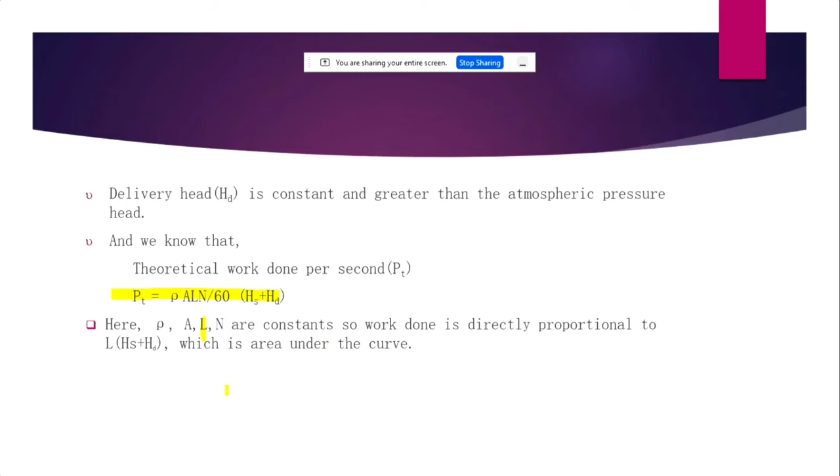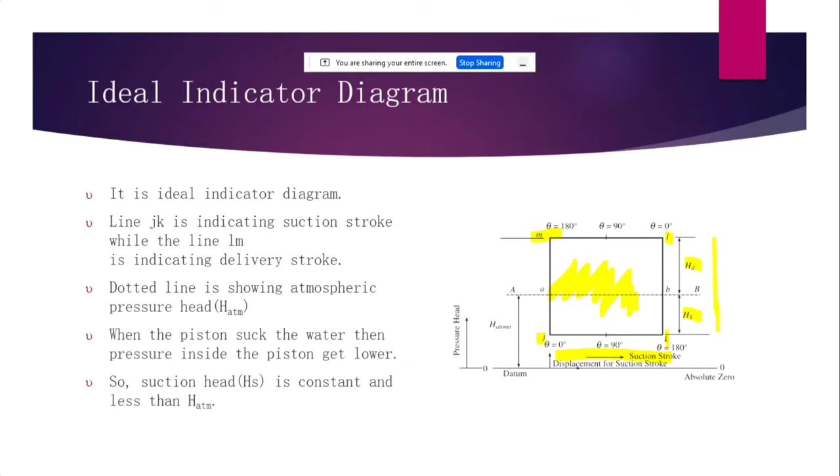We can see here the area JKLM. Here L is nothing but JK, and HS plus HD means this line and this line. The area under this line is nothing but this. Then this area is directly proportional to the work done we have seen here.

Now we will see the indicator diagram with acceleration effect and no friction. We will see here the effect of acceleration only. The acceleration head for the suction pipe is HAS equal to LS divided by G into A divided by AS, omega square R cos theta, and it is also the same for the delivery pipe.

HAD is equal to LD divided by G into A divided by AD omega square R cos theta. The acceleration head is the same for both pipes, suction pipe and delivery pipe, but the difference is: LS and AS are the length and area of the suction pipe, whereas LD and AD are the length and area of the delivery pipe.

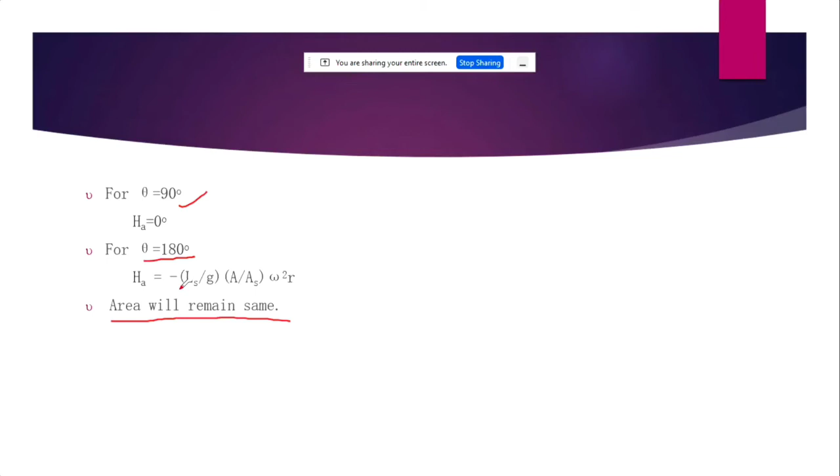Now the area will remain the same as in the ideal case. The area under the curve JKLM will be equal to the area under the curve PQRS, because the amount of area that decreases here is equal to the amount of area that increases here. This amount has increased and the same amount has decreased, so we can clearly see these two and these two are equal. The area didn't change.

Now we will see the indicator diagram considering both acceleration and friction effect. Before covering this, we will cover the effect of friction only. If we talk about friction, the head loss in friction in suction pipe and delivery pipe is given by HF, which is equal to 4FL divided by 2GD into A divided by a into R omega sin theta, whole square.

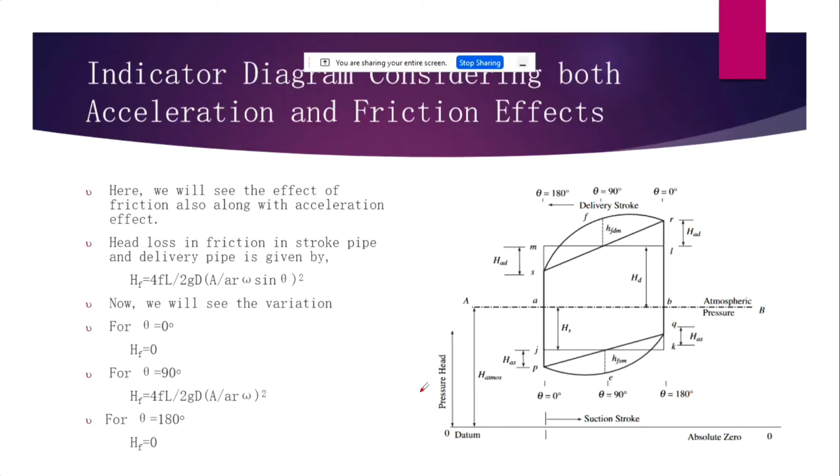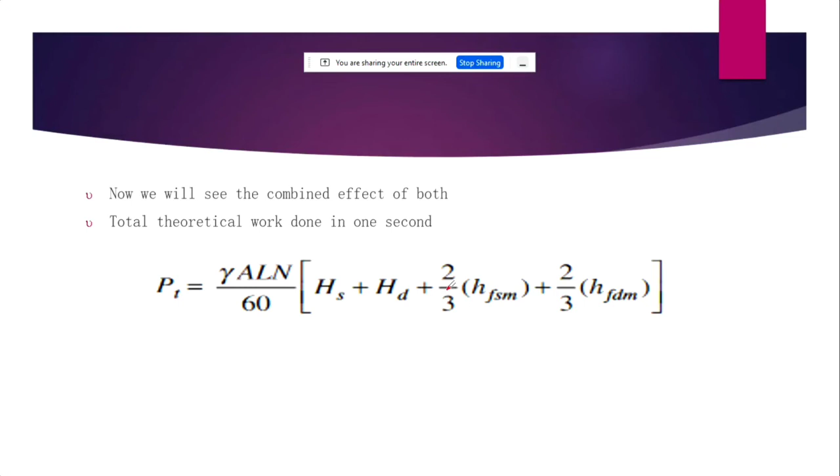Now, the theoretical work done in 1 second will be equal to gamma ALN divided by 60 into HS plus HD plus two-thirds HFSM plus two-thirds HFDM.

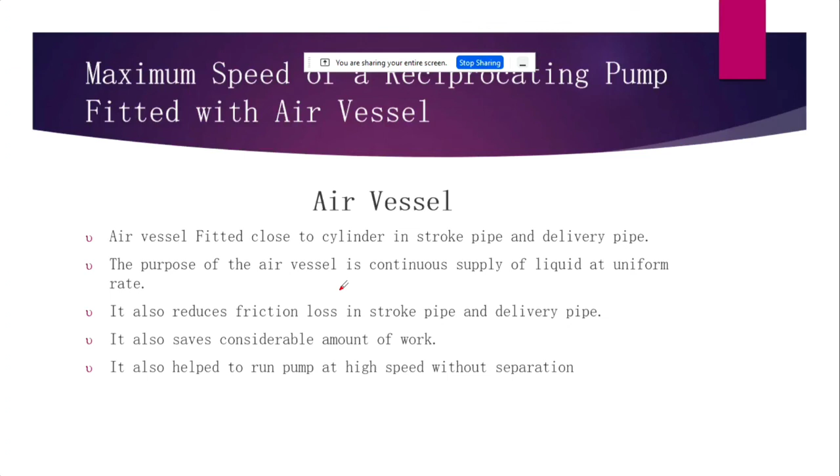Now we will discuss the maximum speed of a reciprocating pump fitted with an air vessel. Before covering this, we will introduce the air vessel. The air vessel is fitted close to the cylinder in the suction pipe and delivery pipe. The purpose of the air vessel is continuous supply of liquid at uniform rate. It also reduces friction loss in suction and delivery pipe, saves considerable amount of work, and allows the pump to run at high speed without separation.

Now we will see HP minimum, which is the minimum pressure in the cylinder that is fixed and mandated not to be exceeded, from considerations of cavitation in the suction stroke. This is equal to this HP minimum, and after solving we got these values, which is what we are looking for. You can clearly see here.

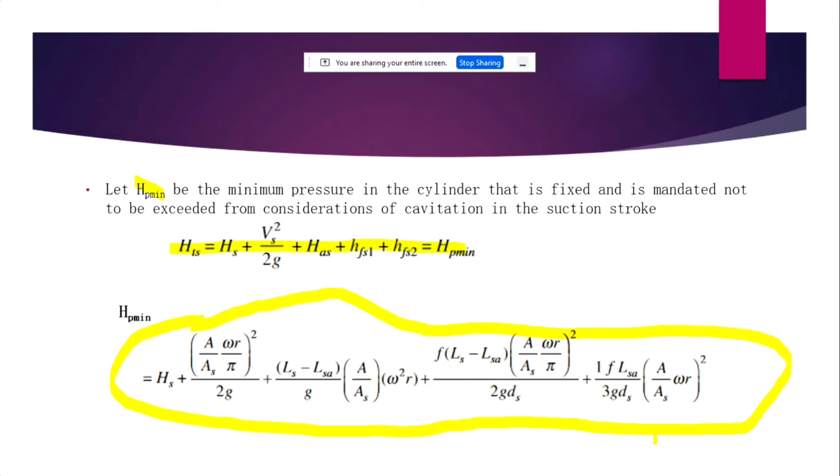Now we will talk about a general aspect, and maybe this is the last topic from my side: comparative study of reciprocating pump and centrifugal pump. The range of operations of both centrifugal and reciprocating pumps is very large and varied, so any generalization can only be in terms of their basic characteristics. Any apparent disadvantage is taken care of by appropriate technical innovation in the application. The following is a brief list of major differences between these two types of pumps.

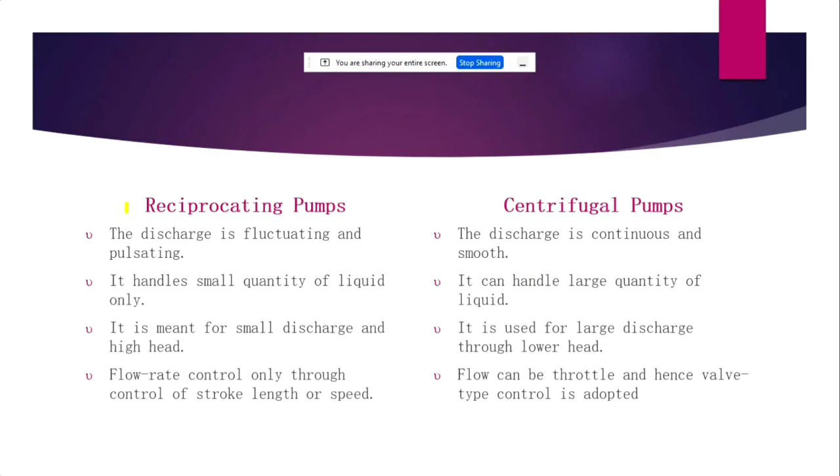Now we will classify and differentiate between reciprocating pump and centrifugal pump. For reciprocating pump, the discharge is fluctuating and pulsating, while for centrifugal pump, the discharge is continuous and smooth. Reciprocating pump handles only a small quantity of liquid and is meant for small discharge and high head, while centrifugal pump can handle large quantity of liquid and is used for large discharge with lower head. This is the major difference.

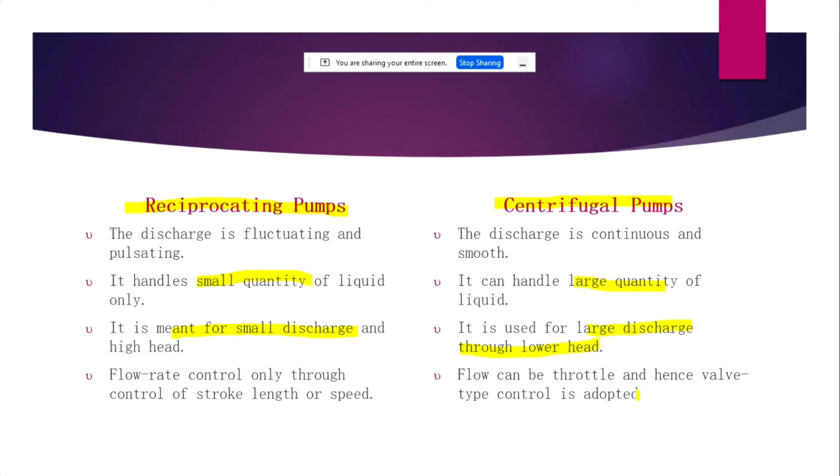For reciprocating pump, flow rate can only be controlled through control of stroke length or speed, while for centrifugal pump, flow can be throttled, so valve type control is adopted. Selection of pump type: a rough guide to selection of the type of pump. Reciprocating pumps occupy a substantial part of the space marked for positive displacement pumps (PDP). It is clearly seen from this figure that PDPs have a niche space in the high head, low discharge category. The regions of appropriate choice of radial, mixed and axial flow pumps are also indicated in this figure.

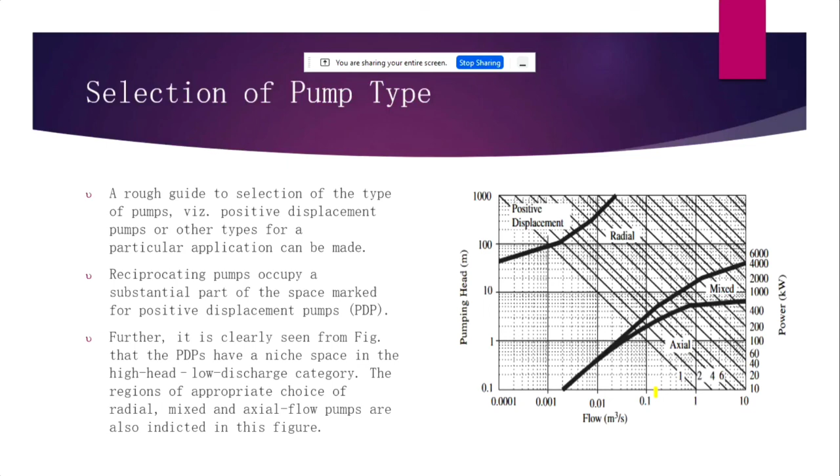Now this is from my side. Thank you.